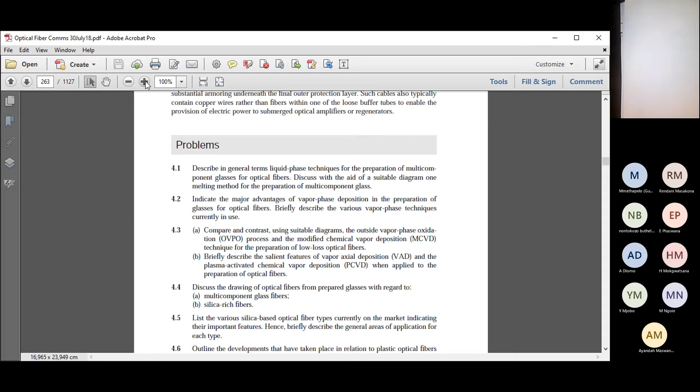Let me make this a bit bigger. Is it better if it's a bit bigger like that? Yes, I'm sorry, it was a bit small. It was a bit small all the time. How could you see such small things? You must tell me immediately. You're allowed to talk anytime, people, you can talk anytime. You can ask me anytime, it won't disrupt.

Eh? What is that? I can't hear you properly. Okay, someone said something, but I didn't follow that.

People, chapter 5 is about fiber connections and joints. How do we join it? How do we join this fiber? How do we make a much longer fiber out of it?

Also, couplers and isolators. Remember the words coupler and isolator. Those two things, you must know what they are. If I ask you what's an isolator or a coupler in a test, we'll get to it.

But we'll do fiber alignment and the losses, fiber splices. That's actually how you join it. Fiber connectors, expanded beam connectors, and fiber couplers. And isolators and circulators, you must know what these are as well.

Right, let's begin. This is an introduction, I'm going to just skip that. I want to tell you that when you join fibers, there are a lot of losses actually. When the two fibers are joined together, you see here, even when it's smooth and perpendicular - meaning 90 degrees or 180 degrees exactly - even then there are some losses.

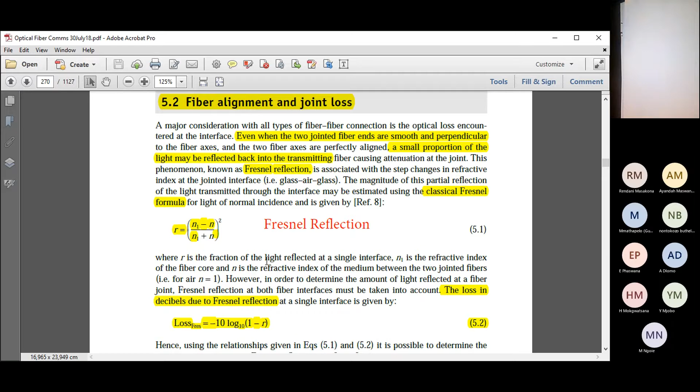So the reflection value is N1, the core value, minus N. N is for the air, okay? Now for air it's usually 1. So it's N1 minus 1. And then N1 plus N, which is N1 plus 1. So you square it and you've got the Fresnel reflection value. So here they say N is 1, which is for air, because we go from air into the fiber.

However, people, if this fiber was inside water, we will go from water into the fiber. So N will not be a 1 for water. N for water will be maybe like, I don't know, maybe 0.9 - it'll be given to you. I'm just mentioning how this N works. So it's a mirror basically going from air into the fiber.

Now the losses in the fiber, the Fresnel losses, is minus 10 log 10 of 1 minus R. So you take that R value, 1 minus R is here, and you calculate the losses. You must know this formula. You must know the Fresnel formula.

So this is just a numerical value, the numerical ratio - they call it in math the numerical ratio. Do you still remember your math numerical ratio? However, this is a dB value in decibels, this value here. So the decibel value, this is how you calculate it. Because I might ask, what is the losses in decibels - not the numerical ratio here, R. Okay.

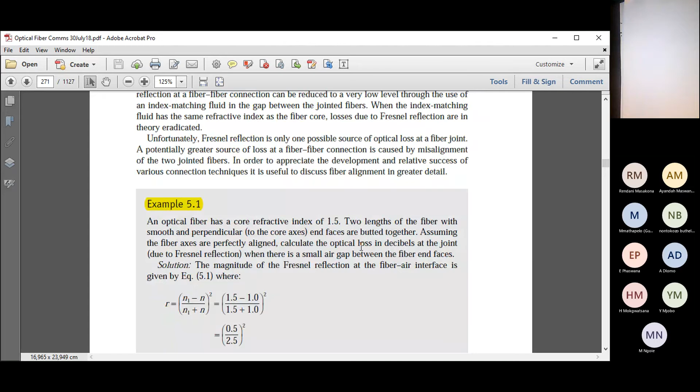Now R is the fraction of the light reflected. You see there - that's your face that you see in the water when you look down. R is your face. Yes, you've got an R face - no, just a joke. Right, so you can do this example. Please mark this example. You must know this example and work through it, because this tells you how the Fresnel losses work.

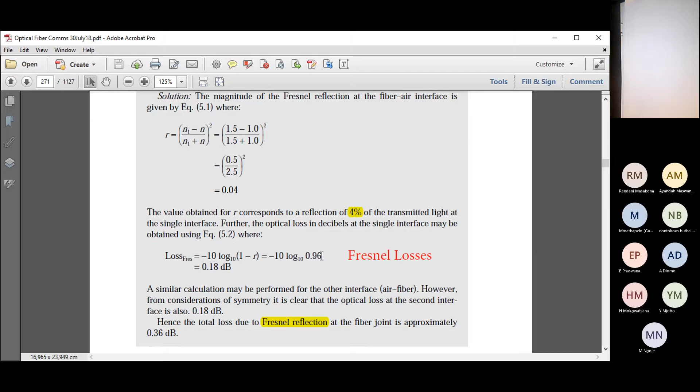Right, I'm not going through the example. Do you have any questions on this?

Okay, then we've got other ways and places where we've got losses for the fiber. There's about 5 of them, but I'm going to show you 3 now. The first is longitudinal misalignment, when the fiber is a bit distant from the other fiber, and you join the two fibers but there's a gap, an air gap. It's longitudinal misalignment, and there's a formula for it to calculate how much the losses will be.

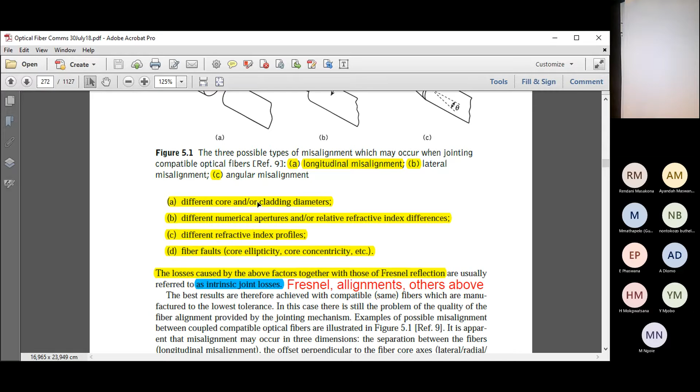Also, other things that contribute to losses are different core diameters. If my core diameter was different here than here, say this core diameter was bigger, then it will not be aligning so nicely, and it will also cause some losses.

Another one, different numerical apertures. So if this fiber has a different NA than this cable, say the NA of this one is 0.2 and the NA of this one is 0.3 - people, you cannot join fibers with different NA. You can try it, but it'll have a lot of losses. Just remember that, it will work for a short distance, but there will be some losses.

Alright, fiber faults - maybe the core is more elliptic, or the concentricity isn't so good. So if it's elliptic, it's almost not circular, it's like an ellipse, and this one is circular. Imagine the diameter is smaller in this direction and bigger in that direction because it's elliptical. Then you will have a lot of losses because the cores are not the same - they were manufactured from different cables, so it's not a good idea to join them. But if you really want to do it, you can. Just remember your losses will be more.

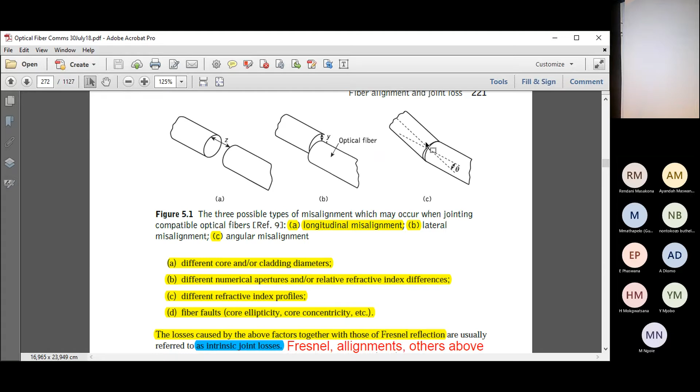I don't have formulas for these four, but I've got formulas for these three here. We'll get to the formulas now, we'll talk in detail about this. But you can see here, people, there are 7 things causing losses, do you see the 7 things? The 8th one here is really the Fresnel losses, okay?

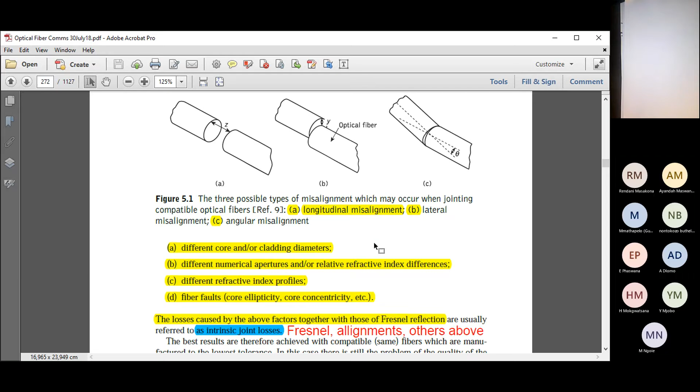So it's 1, 2, 3, 4, 5, 6, 7, and then also the 8th one, which is the Fresnel one here. So add it to these ones to get your total losses. So each cable, when you join it, there are a lot of losses for it.

Right, I'm going to carry on and skip a lot of stuff here until I get to multi-mode fiber joints. It can also have lateral, angular, and longitudinal misalignments, and there will be losses, but I'm not going in detail into that. I'm not going to do this formula.

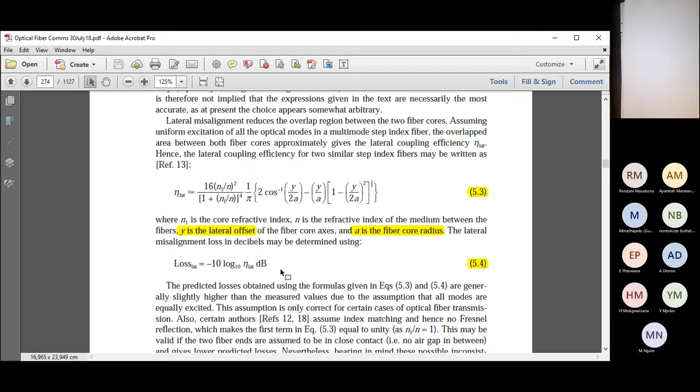But you can look at this formula here. So the lateral losses is this one. There's another one, 5.5.

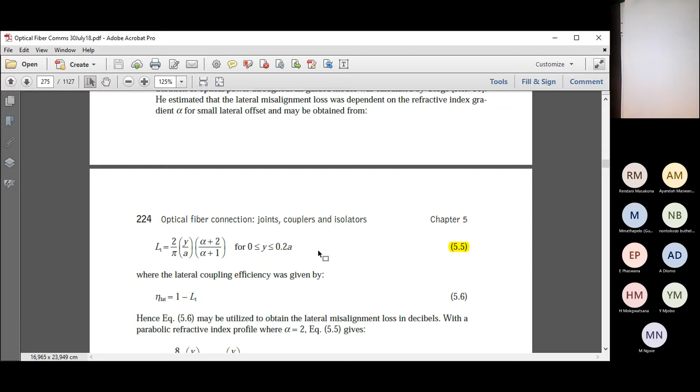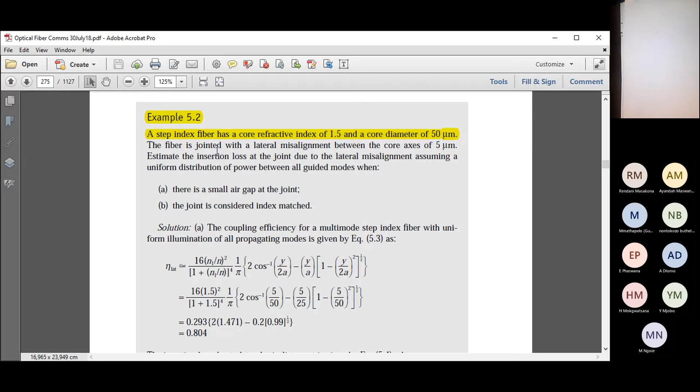And then you can really do this formula in this example, 5.2, step index in Chapter 5 with this. I'm not going to go through it, you guys can go through it. So in this one you can calculate your lateral losses, and actually it's called the coupling efficiency.

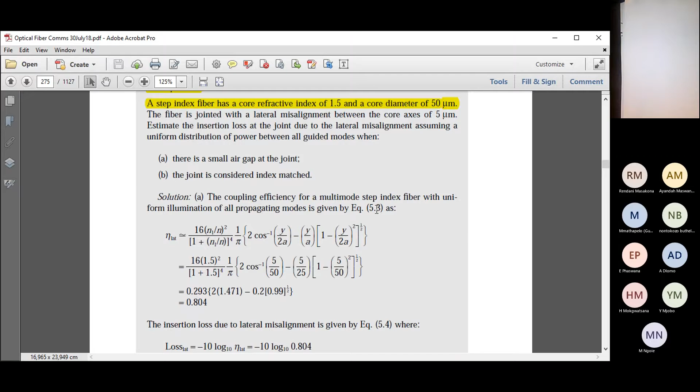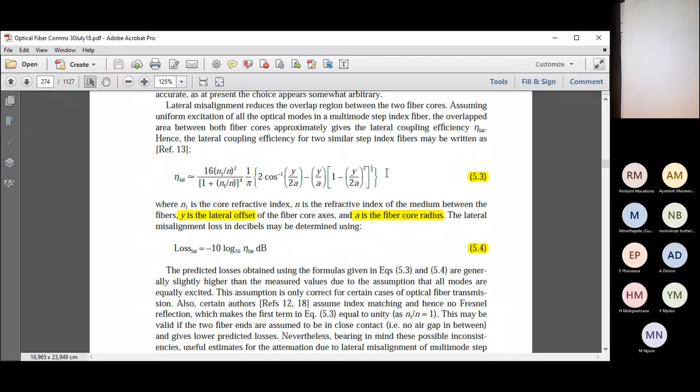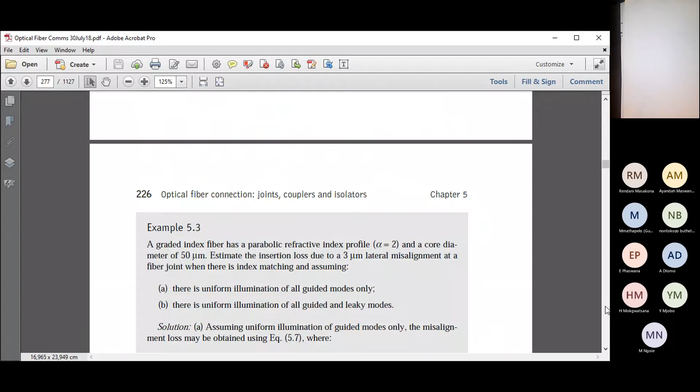Coupling efficiency, look at the formulas - 5.3 and 5.4. It says those equations are the ones above here which I showed you, which are these ones, so include this one. Sorry, I made a mistake, just include this one. Alright, so do that example. And here, I'm going to skip this example, I will not ask you this one.

This is for the graded index fiber, which is just the same as for the other one. But I'm going to leave this 5.4 example as well. I'm going to leave it alone. I'm not doing it.

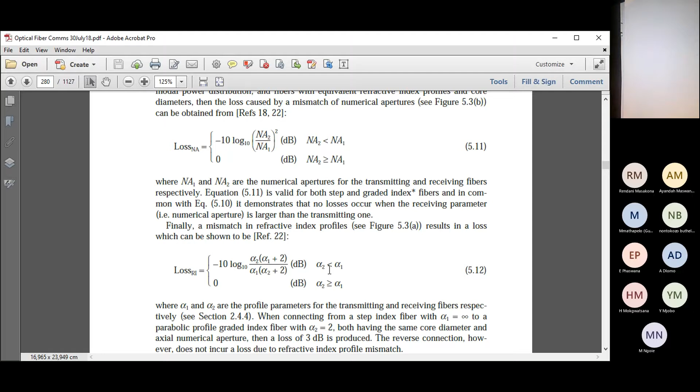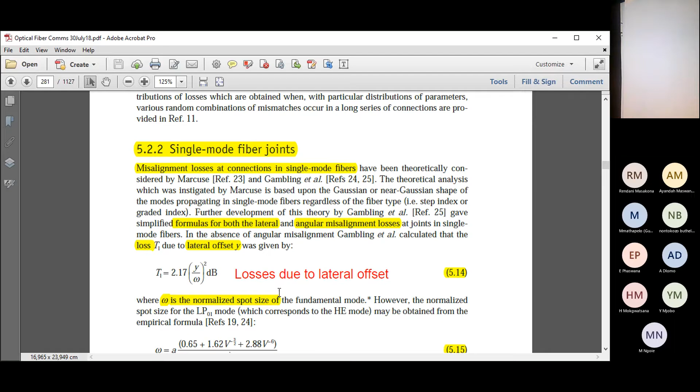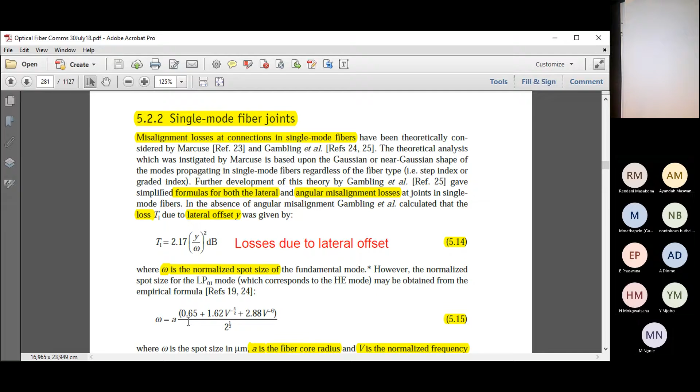So you can use this formula to calculate, where omega is the normalized spot size. The spot size here, and the omega you can calculate here. To calculate the spot size, you can use this formula. And I think we had it 2 weeks ago also. But it's basically this one, that is minus 3 over 2.

And let's just do a minus 6 there. And that is 2 half, which is the square root. So just remember the formula is very fixed there. These numbers are fixed. And you multiply those with the, I think A is the radius. That's not the diameter. People, if I give you the diameter here in a test, I'm going to catch you, because it must not use the diameter here. I'm pointing it out to you because that's what I do. I give the diameter here and then you come and put the diameter in there. Then this one is wrong.

So calculate your normalized spot size, omega, put it in that formula, and then you've got your losses here. And that loss is actually already in dB. You don't have to say 10 log, it's already a dB value in losses here. Okay, that Y is the lateral offset, okay? It's all written here, so look at this page.

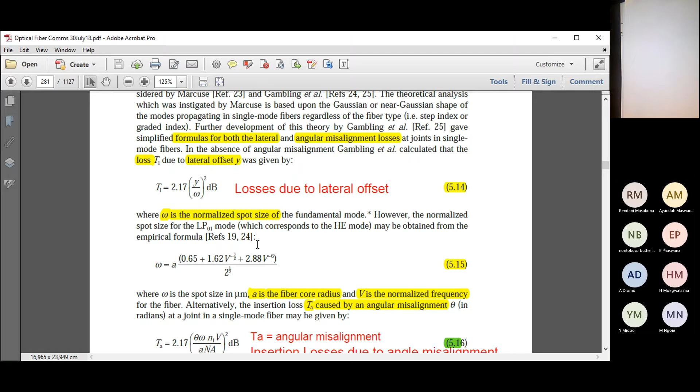And this one is the angular losses. So the angular losses, it's also in dBs - is your angular misalignment value, and insertion losses due to angle misalignment. So if I ask you to calculate the insertion losses, and lateral losses, I can give you these two formulas. You have to calculate that.

Right, I'm going to skip. There's an example, and look here, I've asked it twice in previous exam papers, so you can see it's important to go through this one. Go and work through this example 5.5. It tells you how to do different losses, and then at the end, if I ask you the total insertion loss, don't give me that one - that's only for angular misalignment. Then you must add those two losses up here to give me the total value. Do you see? So all two together will be added up to form this value.

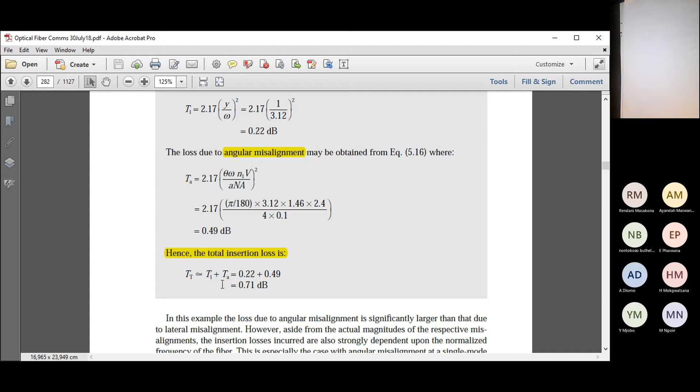I'm going to skip this example, I'm not doing it. Example 5.6, skipping there.

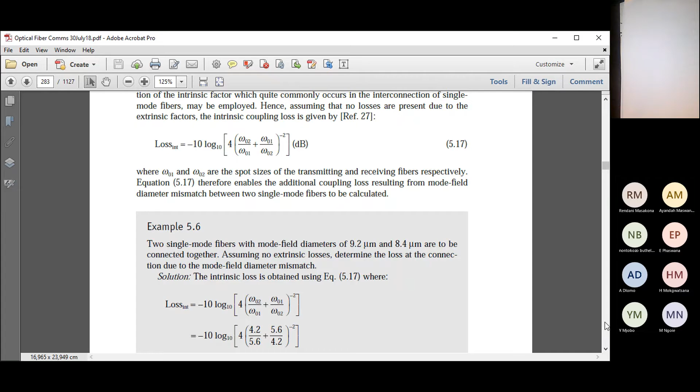And we're coming to fiber splices. Splicing fiber means how to join the fiber, really. So we've got mechanical splicing, and then we've got fusion splicing. These are the main two types, people. If I tell you to give me the main two types of splicing, most people cannot do this, but it's in this paragraph here, it's written.

Fusion splicing is when you apply it with heating. Mechanical splicing is when you hold it together with a joining - that's fusion joining, we melt it. This one we don't melt, we just hold them together right across each other, held there mechanically in a clamp.

Alright, let's do it in detail. First thing, when we want to splice a cable, we take a knife edge and we make a crack in the fiber there. This is a mandrel. We curve it over the mandrel and give it a cut here. It's going to break off very squarely, a 90 degree angle here at this point. So we cleave the fiber. We call it cleaving.

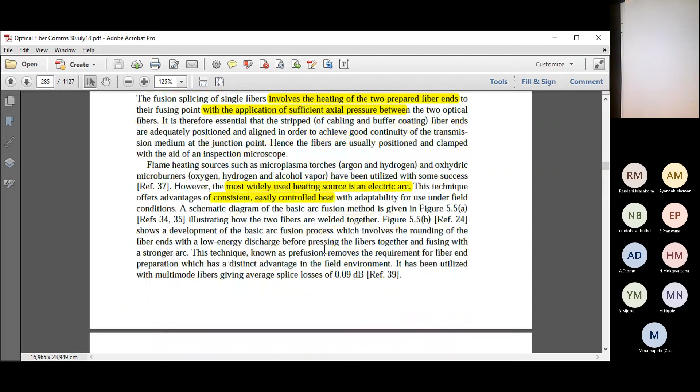Fusion splices. That is now when we melt it together. Okay, how do we do it?

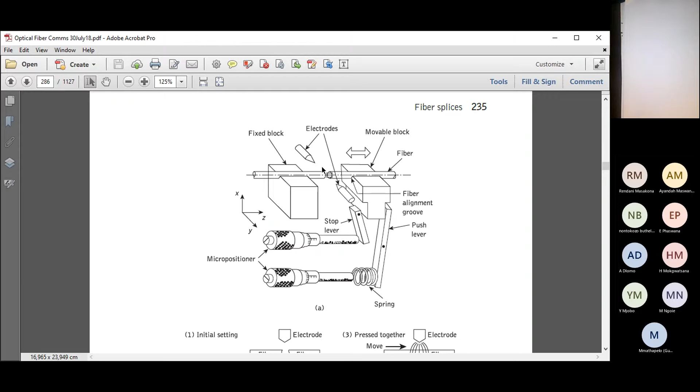It's like this. They've got two electrodes on the side of the fiber, and two mechanical clamps, one here and one there. They align these two blocks to each other. Your eyes can't do it because you will never see that with your eyes, but they can do it by shining light in here and seeing how much light comes out, aligning these two perfectly. Then they press them together and melt it with these two electrodes with the electrical arc. So there's your fiber joining, and I melt it with an arc here, and it's square.

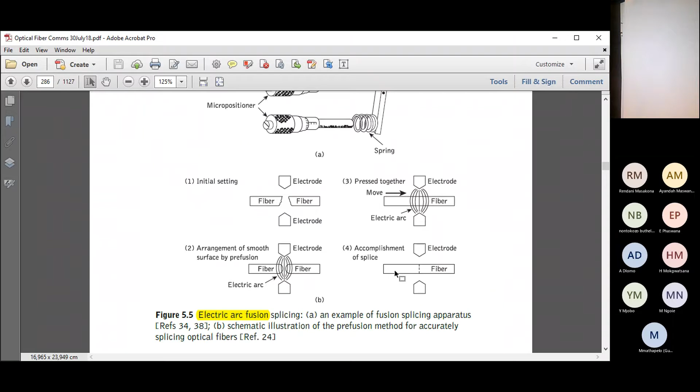It's arc fusion. With an electric arc, they arc it, and it's joined. The fiber is joined like that. Not so perfect like here, but almost perfect.

Right, that's mechanical. Oh no, sorry, that is fusion splicing. In this case, they hold the fibers next to each other, but not very well. You can do it with your eyes. You align it almost precisely there. Then when you give heat at this point, it will self-stretch, and it will connect like that at first, because there's surface tension here.

The surface tension will make it straight. It will straighten as soon as you melt it, and there will be a small error there, but it will be a good fusion alignment, self-aligned splicing here. So you can check out this picture, also figure 5.6.

Now we're getting to mechanical splices, alright? It's a common method where we align the two tubes, and to align them we can put them in a ceramic capillary, just big enough for those fibers, and we join them with epoxy. They take epoxy glue and seal it mechanically.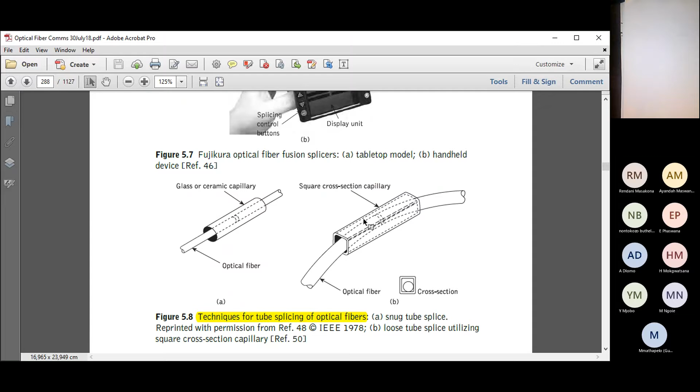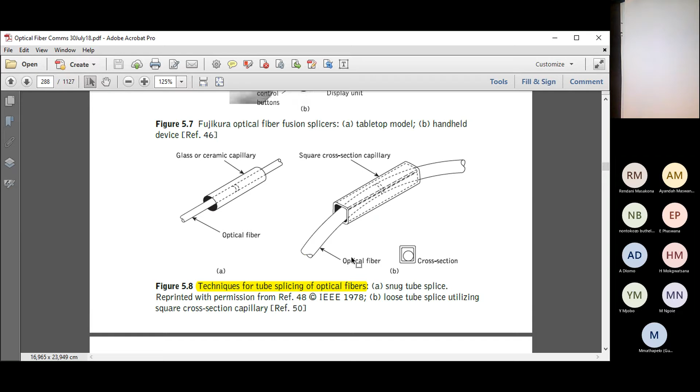This picture shows how they do the alignments. Also what we have is V-groove alignment. You can read this stuff here, V-groove alignment. They talk about it, and they fill up with epoxy resin after the V-groove join. The losses here are typically 0.1 dB, which is very little, but there are losses when you join.

This is a V-groove, this is how it looks. I've asked it in that exam, by figure 5.9, you must know it. The V-groove method, it's a V-groove there, you see the V? It's a little groove there. This is very small, people.

This is like half a centimeter by half a centimeter, a little V-groove. So what you do is take the fiber, put it in that corner, this fiber into that corner, and put epoxy and glue in there. You're going to glue this thing together. What you do is put a little flat top, there's a lid, you put it on top and clamp it. The glue is now in there, it's joined. The V-groove will align it, so you've aligned this fiber.

This is another one, it's an elastomeric splice. What you do here, it's a little tube like that, also very small, 1 centimeter long. Then you put, there's a little hole in the middle with a cone here to help you find the hole, otherwise you'll never find that hole. There's a cone cut out there also, so you put the fiber in the cone cut out and it will go into the middle. You put some epoxy and you are done. It looks like this afterwards.

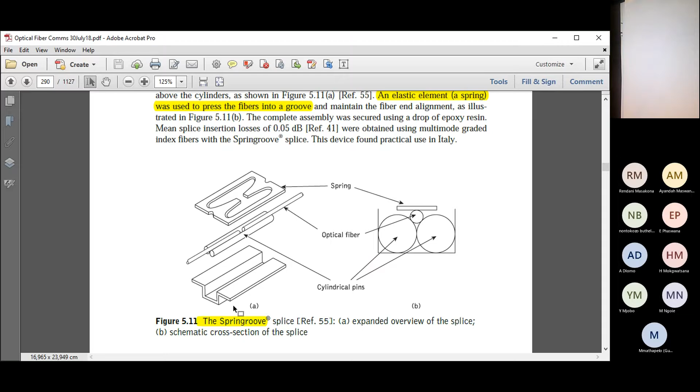And then there's a spring groove. What I do here, they take 2 cylindrical pins. They put the fiber on top, and I put a little lid on a spring. The spring looks like this. So they put it on top, and this whole fiber will be very well aligned here, and they will glue it together with epoxy. So that's the V groove and a spring groove, and the cylindrical splice. The 3 types - you must know those 3 types.

You must know these pictures, how to splice a fiber. This is how to splice it with capillary tubes. So there's your capillary tubes that we talk about, your cylindrical sleeve, okay?

What I then do, this fiber comes in here and it ends in a glass ferrule there. This fiber comes in, it ends in a glass ferrule there. And what I do, they just put it together with a little sleeve here, and I join the 2 fibers. This is how it looks inside a connector, because there's no glue here in the middle and you can still separate the 2 connectors from each other. So you can unplug your box here, but the glue is usually inside this part. They put the glue inside that ferrule, and that ferrule they will put epoxy glue in there also, and the connector will join it.

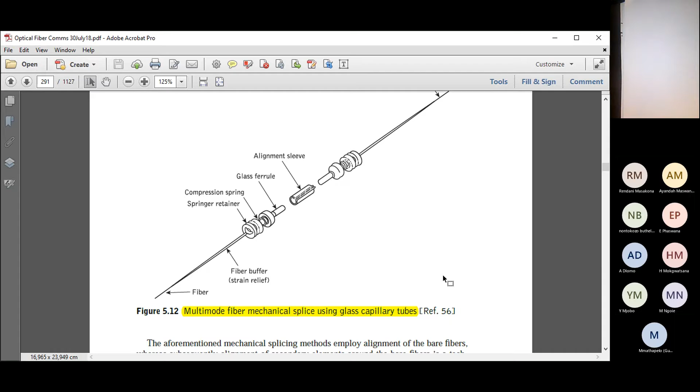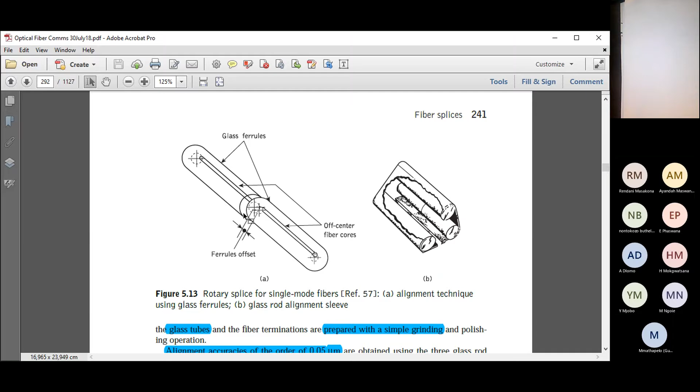I'll show you another connector now. Okay, this is another way of splicing it. They've got an off-center hole there and an off-center hole here, and I will turn them until they align. It's another clever way of doing splicing with 2 ferrules. I call this a ferrule, and that ferrule there, and I will align them by turning them. It's not so important, but I'm just showing you for the interest's sake. There's different ways to splice and join fibers.

Multiple splices, people, that's if we must do more than 5 or 10. What we will do here, it's almost like a ribbon cable. There's your ribbon with maybe 10 fibers. You clean the plastic off here, okay? Then you've got a silicon chip at the bottom with grooves in it, and a silicon chip on top with grooves in it. And what you do, you push the ribbon in from this side and the other one from this side, and you clamp it with these 2 top and bottom silicon chips. It's very small, like 5mm by 6mm, or even smaller. But you can join 10 fibers or more with this. It's actually a 12 fiber splice, what we say here.

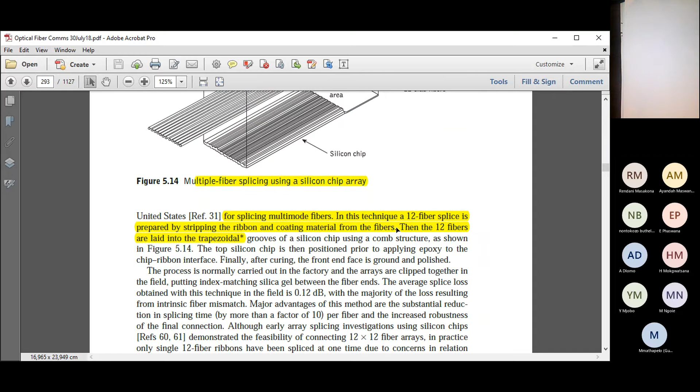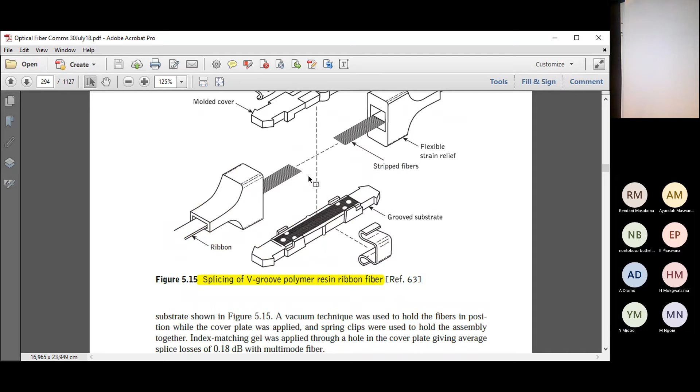You can have this type V groove polymer resin where you've got another 10 or 12 fibers, another 10 fibers here on a flat cable ribbon coming in. You must join them here. How do you join them? You put them in this clamp mechanism with grooves at the bottom, and that one has got V grooves on top, and you just clamp them in, and afterwards you put the steel clamp on it from this side, and the steel clamps will hold the whole lot together. And then what you'll do, you'll put epoxy glue there in the middle and it will be joined.

You buy this connector, people - this connector costs about 800 Rand if you buy it. But you can buy it, you can join fibers with this connector, and you can unplug it again.

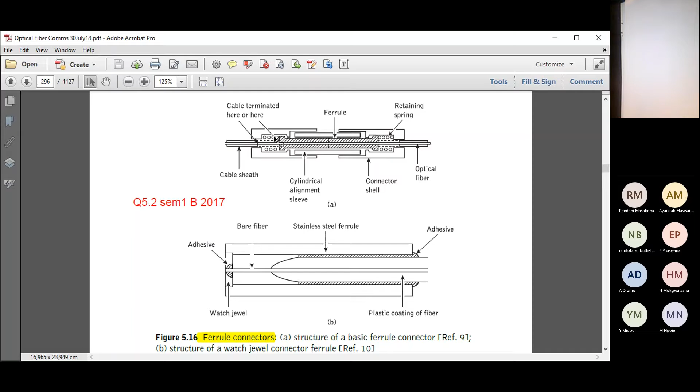That's where the mirror will be. Okay, so this is a ferrule connector. I'm showing you other ones as well, but I'm just showing you this one now. This is how you can unplug this connector again to move your box to another room, then plug it in again with some other cable. That's very nice, but the losses here are a little bit more than when you melt it or do V-groove or cylindrical joining. The losses are a little more, but it's not too bad because we can actually remove the cable, unplug it.

So this is an ST connector. You get SMA connectors here on the sides. You get all kinds of connectors here. I'll show you just now.

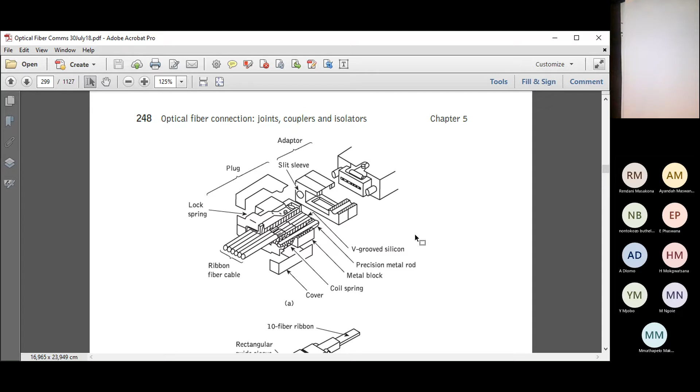It's just other ways to do it with multiple fibers in a connector. This is how they do it. You don't have to know this picture, I'm just skipping it quickly. Here you can see there are other connectors like an SMA, like I've said, an FDDI connector, a D4 connector. That's an ST connector with a bayonet there.

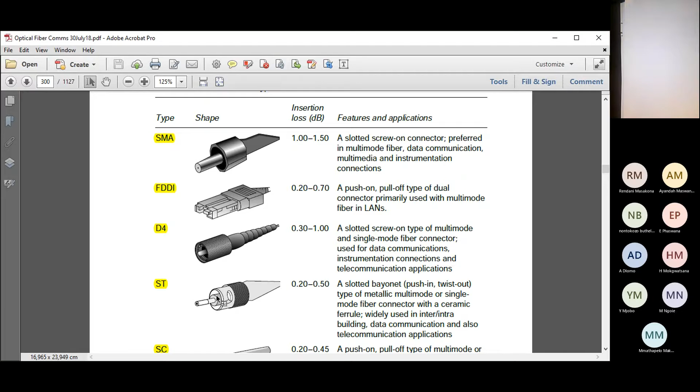This is an SC connector, simplex and duplex, one cable and two cables. You can do both here, but mostly we do one at a time. There's your FC connector, your MU connector, your LC connector, your E2000 connector. People, they are all different, but I've seen this E2000 a lot on the lasers lately. They use this connector for the laser.

It's got a little plate there to protect it against dust, and when you press this button here, it lifts up that plate, and the fiber is exposed. You can join it with another connector. This is a type of connector that I plug directly into the laser module. It looks like this. Then you get the MTRJ connector, the MTP connector.

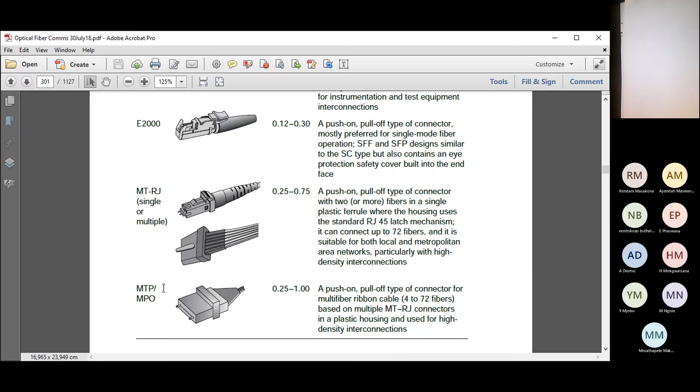Guys, do you want to learn all the names? No, I'm not going to ask you any of these names. I'm just showing you what they are and what you get. You get hundreds of types. You can't believe it. And look here.

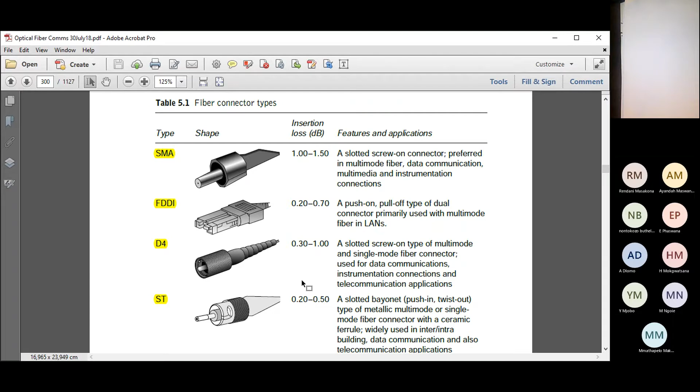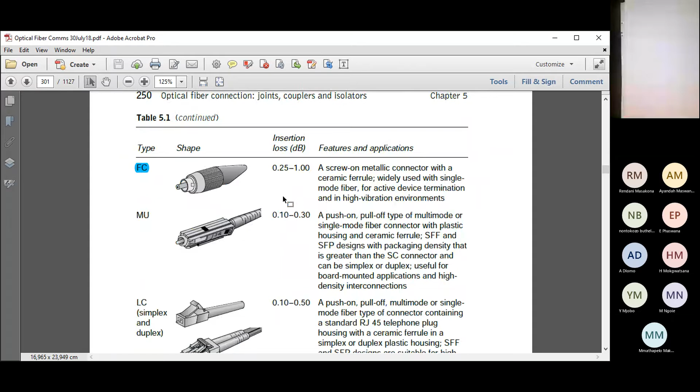Do you see the sizes are all different? And the losses, sorry, not the sizes, the losses here. They give the losses for each one. If you want low losses, you choose here, like this one. Like I said, this one is also very popular, as well as this one. Losses are very low. See, those are the losses. Right, I'm done with it.

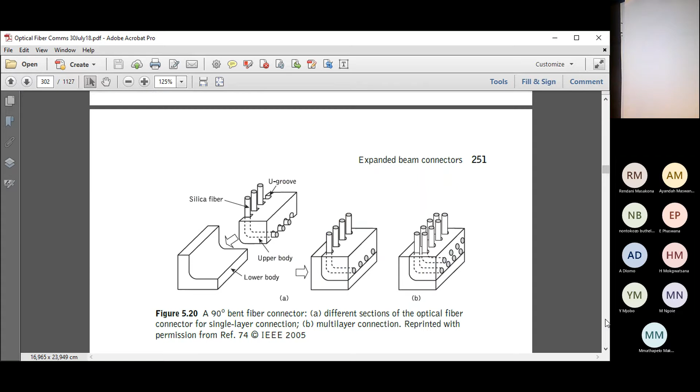You don't have to know these pages. What I'm showing you now, you must just know that there are other cable connectors which we don't know of. We've never seen them. We rarely see all of them. We usually see one or two types these days.

Okay, expanded beam connectors. How can we align these things? It's very difficult, man. When you align these two little fibers, it's very, very difficult, and alignment's not very good. So what happens? The signal doesn't go nicely through. It's big problems, people, big problems.

Expanded beam connectors. I think you must know this one. What is an expanded beam connector?

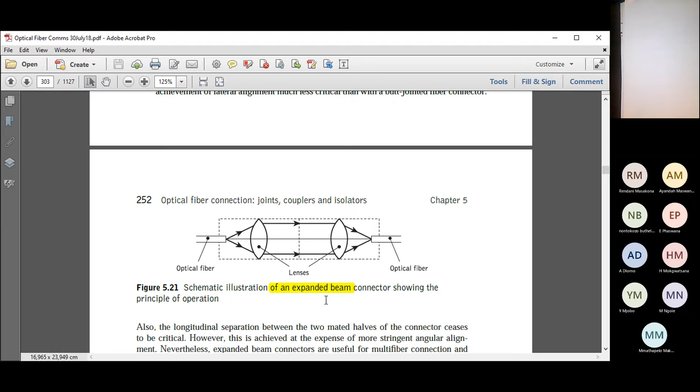The next one I'm going to talk about is micro lenses. I'm not going to talk much. They put little round ball lenses in there, in the connector. People, this is 1 millimeter small. It's very small, but they are round lenses there.

And it works like this here. It will have a diverging point here and a converging point on that side. So the thickness of this connector is about 6 millimeters from there to there. So it gives you an idea, this lens is only about 1 millimeter big.

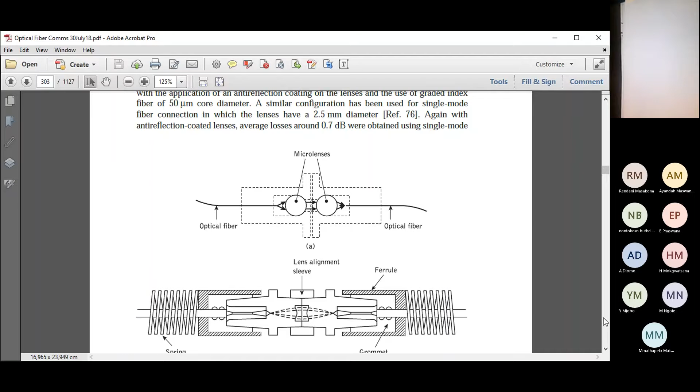You don't have to know this picture, I'm just showing it. And a lot of other things.

Okay, something that you must know is GRIN-rod lenses. What is a GRIN-rod lens? A GRIN-rod lens is a collimation lens. You see the word collimation.

And it's basically a graded index lens with collimation. What does collimation mean? Man, it's another English word. I don't even know what you'll call this in Zulu or Sotho. They will have some other explanation, but these words are not translatable even in other languages. They just call it collimation. So you must just learn the word, okay?

Because I can't translate - collimation means basically you put in light that is not focused at the right point, and collimation means you can focus that light on a point. But collimation also means, even when the light is like oval shaped, a collimator lens can make that oval shaped light round. Even if you have a light beam shaped almost like a triangle, you can make a collimator lens that will fix that light into a round spot.

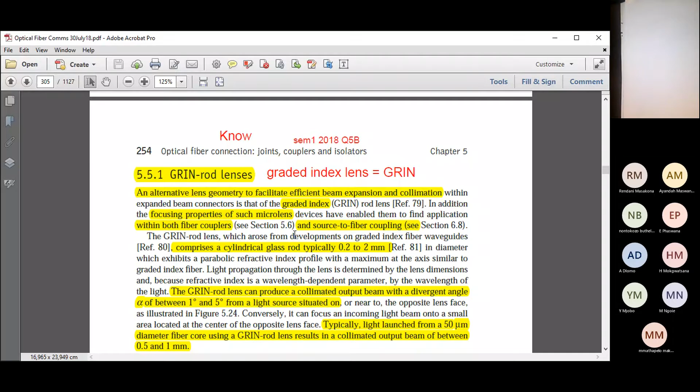Right, there's some formulas for them. I'm not doing the formulas - you are lucky. This is a collimator lens.

Right, there's 3 types of lenses. I'll talk about all 3 now. But let's do the first one - this lens has got a certain length here.

You see there, 0.25 pitch - that is the pitch of the signal. With 0.25 pitch, we also get 0.29 pitch, né? And a 0.23 pitch also. So I'll talk to you about those 3 now.

But basically, we've got 50 micron coming in - this size is 50 micron. Then we go to a half a millimeter here, the lens size, and it will diverge the light from this light to an almost parallel light here. So the collimator lens makes this light a parallel light, and it translates from 50 micron input light to 1000 micron light here.

People, 50 micron input light is like your hair, okay? 1000 micron is about 1 millimeter, so the beam will be 1 millimeter big. You can easily align this side, okay? But let's look when we put 2 collimator lenses together, we get a beam right through it.

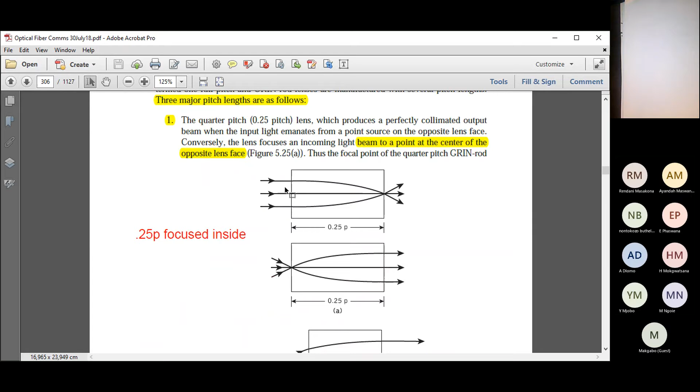And they explain here, this is the picture on top, and they explain it here. The focus is collimated outside the lens at 0.23. 0.29 also. Both focals are outside the lens, do you see? But on the first one, it's inside, it's not outside the lens. Here, it's just on the edges of the lens. 0.25 pitch.

It's outside the lens, the focus. Outside the lens, outside the lens. That is why we've got different pitches here. Guys, you must learn the stuff. Figure 5.25, please know it.

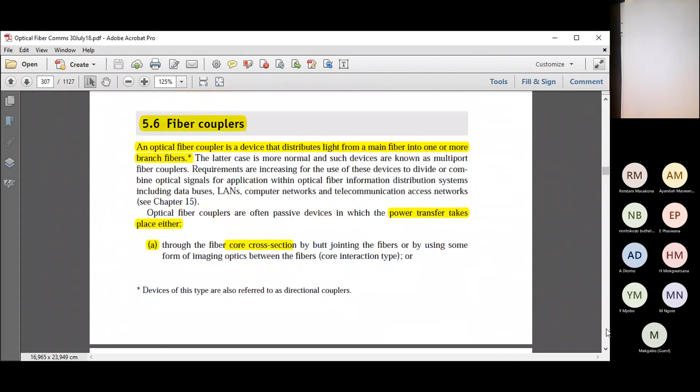Fiber couplers. Right, we can couple fibers this way, but we can also couple fibers this way, sideways, do you see? Okay.

So, in this case, they will react to each other with the surface here. In this case, that mirrors the Fresnel mirror there. But here, sideways, no. When we use that one, this one, we can have 1, 2, 3, 4 ports. They call it 4 ports. This can be a 4-port connector. This one doesn't have ports, okay, but this one has 4 ports.

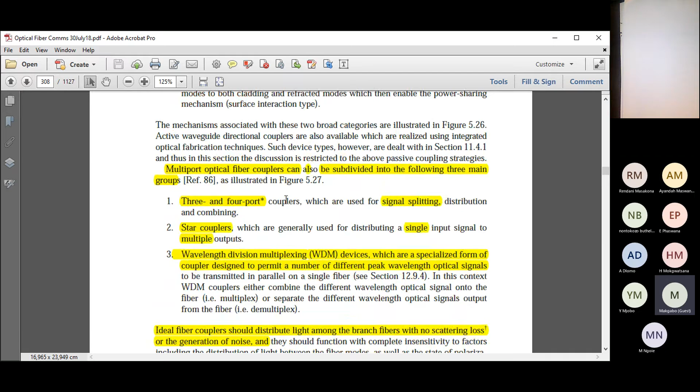How does it look? Now we're coming to it. We can have a 3 and a 4-port connector and a signal splitter. We can have star couplers and we can have wavelength division devices. But you don't have to know these points, I'm just highlighting them to you, what you can have. Now I'm going to get to them in detail.

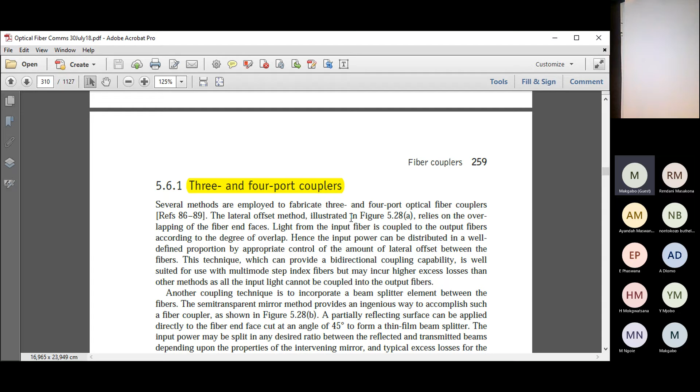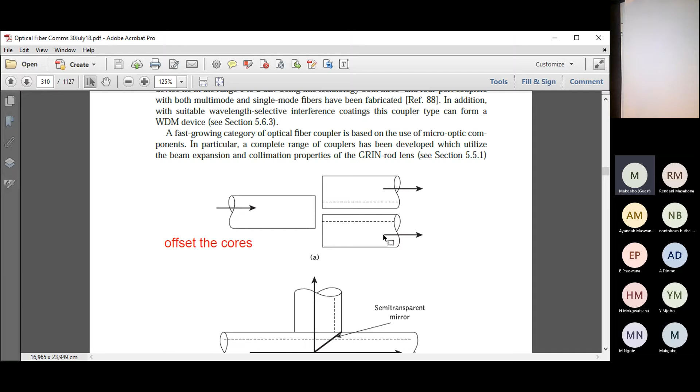Now we're coming to the 3 and 4 port couplers I talked about just now. Here they are: this is just 2 fibers going out and 1 fiber coming in. We want to combine them, send a signal in there and join the same signal to that one. We'll put some epoxy glue there and then we've got a splitter.

Also, we can do it like this: we can make a 3-port coupler with a semi-transparent mirror. Light comes in here, and there's a little mirror, half a millimeter by half a millimeter, inside the fiber. We shine the light coming in here, splitting it up to another one there, and it goes on. This is a 45-degree mirror, called a semi-transparent mirror.

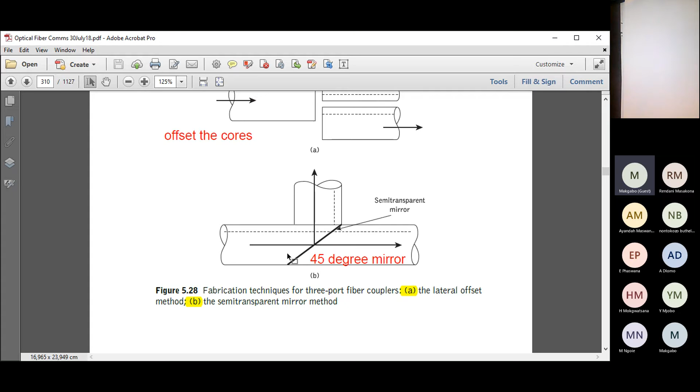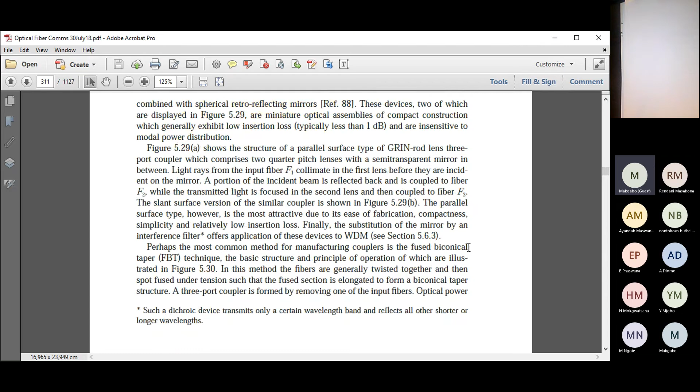You don't have to know these pictures, but just note how they work. Then you sort of need to know this one - this one you need to know the formulas for.

I'm going to go to the formulas now, it's easier to talk about them. So you can get the ratio of power into total power out of the fiber. This is a 4-port coupler, and we call this loss the excess loss.

It's already in dBs, so you must say 10 log 10 of power 1 over power 3 plus power 4, or port 1 over port 3 plus port 4. So this formula, the output is coming in at 1 and going out at 3 and 4. We can calculate this value and that value going out by using this formula.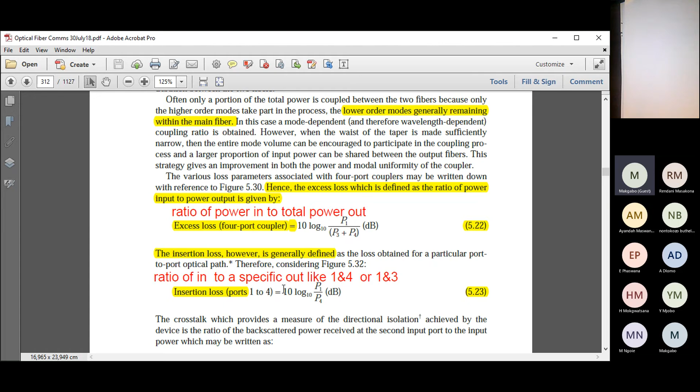I'll use this insertion loss formula for going in at 1, going out at 3. And I'll use that insertion loss formula for coming in at 1, going out at 4. Port 4 is an output, port 3 is also an output - you use this one for the insertion loss. At the end of the day, I want you to calculate the excess loss and the insertion loss. I'm only giving you the input power, then you must calculate the rest.

Then I can calculate the crosstalk between 1 and 2.

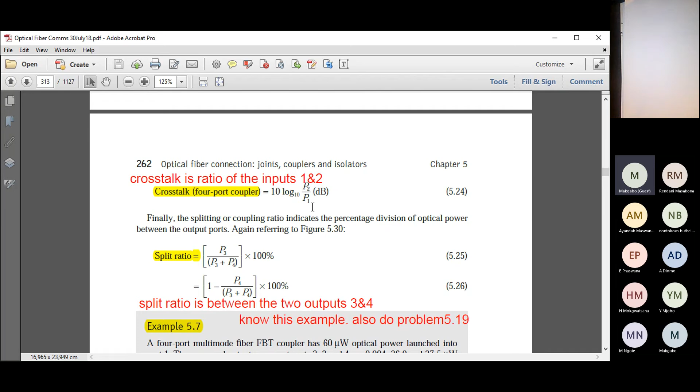Ports 1 and 2 will tell me how much crosstalk is in that fiber. Crosstalk is how much signal leaks into channel 3 and channel 4. You can use this formula: it's P2 over P1, and we calculate the crosstalk. Looking at the figure again, the input signal comes in here, and a small signal goes out there. This is a measure of the crosstalk in a fiber, coming in here and going out at 2.

That's the third formula. The fourth formula lets us calculate the split ratio - how much power is split between channel 3 and 4. The split ratio is P3 over P3 plus P4, and this one is not in dB, it's a percentage. So the split ratio could be 50%, meaning power comes in and splits 50% one way and 50% the other way. However, if the split ratio is 40-60, it means 40% goes out at 3, and 60% goes out at 4. It's the split ratio between the two.

So, to recap, we've got insertion losses, we've got crosstalk, we've got split ratio, and we've also got excess loss. Those four things you're going to calculate with this 4-port joint here, or coupler.

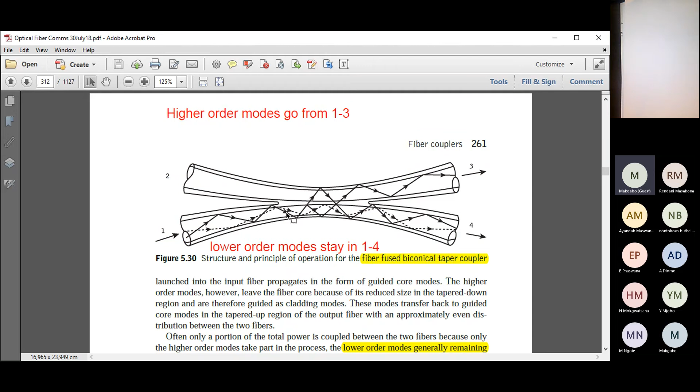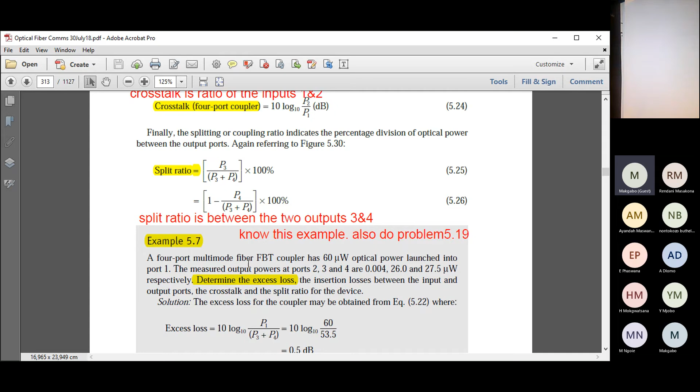Sorry, I've got a phone call. I just want to tell him not to disturb me. Hello? I've got a class, can you call me in an hour's time - hour and a half? What is it about? Just call me later, thank you. It's not my students, I thought it might be. Why I'm answering is it might be one of your Opto students, he cannot log in or so. Normally I don't answer my phone, but I just wanted to know if it's one of my students - I obviously must help him. That's why I'm answering the phone. Normally I don't do that.

So this example, people, you must know this example. Go through it, work through this example, and do it. It's a high percentage chance that I can ask you this one. I can ask you the excess loss, the insertion loss, the crosstalk, and the split ratio. These are in dBs - dB, dB, dB. But this last one, split ratio, is a percentage - how much is it split, the ratio. It's in a percentage, not in dBs. Okay, I'm done with it.

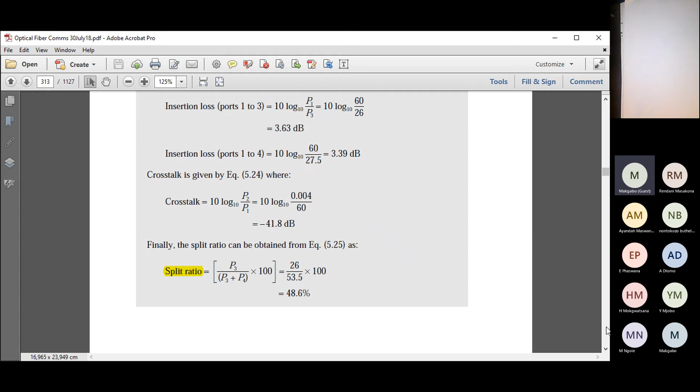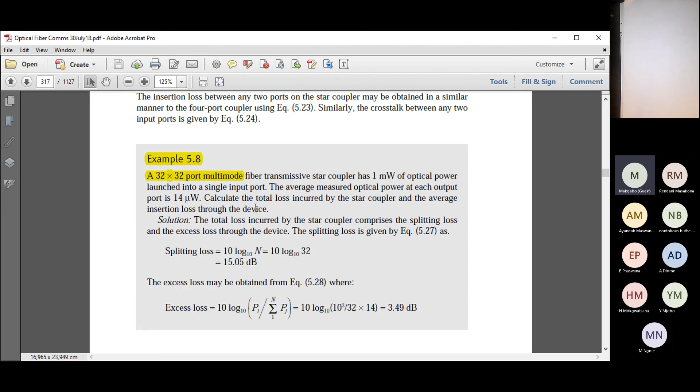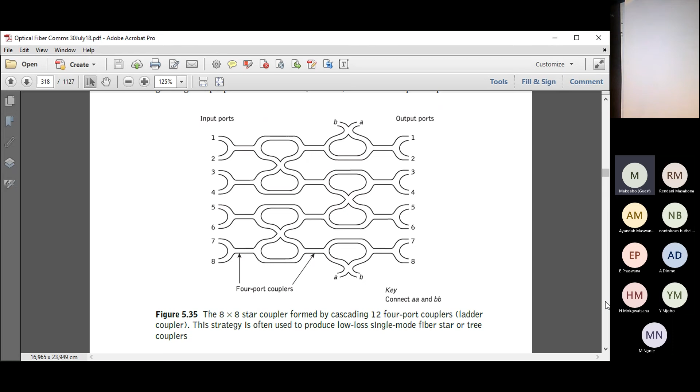Optics is a science on its own, just like electronics. They can amplify signals, they can divide it, they can add it, they can do mathematical functions. In optics, they can build a mathematical optic computer - it doesn't work like a normal computer, it's 1,000 times faster than any PC you can find today. These optical computers can do a lot of different things, a lot of mathematics optically, and much, much faster. They say the future will only have optical computers, it won't be electronic computers like today - they are just too slow. Okay, just for interest's sake, optical computers will be the future.

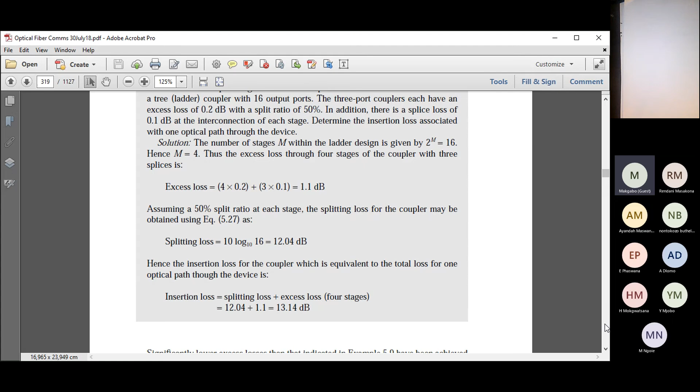Okay, this is, we don't have to know this. I'm just going to skip this stuff. I'm not going to do this at all.

Okay, this is an interesting one. This is what they do here. They split the light, and this is how they do it. That's called a Littrow grating demultiplexer.

So your 3 colors come in here, in 1 fiber. Then I've got little prisms there. People, this thing is like a quarter millimeter big. A quarter of a millimeter, this is small stuff. You can't even see this thing.

And then the light reflects off that surface. They can adjust it up and down here, and they can have different colors coming out there.

It's a graded-index lens. They also use graded-index lenses for this. They use graded-index lenses for a lot of optical stuff, guys. That's why you must know what's a graded-index lens, and that's why you must know what's a 0.25, 0.23 pitch, and so on.

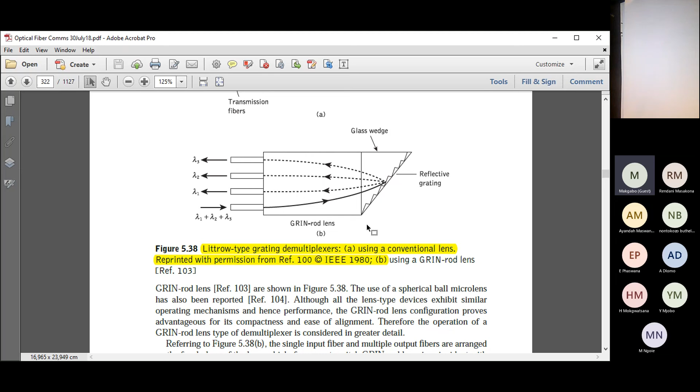But this Littrow grating demultiplexer is just a lens with a sort of a prism interface here, and then they can split the colors. That's how they do it. Very clever, this as well.

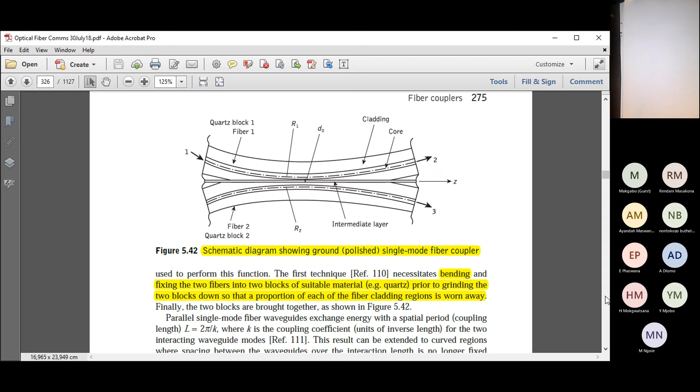I'm just skipping this, just the same stuff, I'm not going into it. This is really how they do a 4-port coupler. They actually sand it down to 50%, until the core touches the other core, and then they join it. It's just don't learn it, it's just a picture showing how they do it. Okay, you don't have to know this. Nothing here.

Okay, you must know this stuff. An isolator and a circulator. Most people don't even know what it is in the exam. I might ask it, probability is high. What is an isolator and what is a circulator?

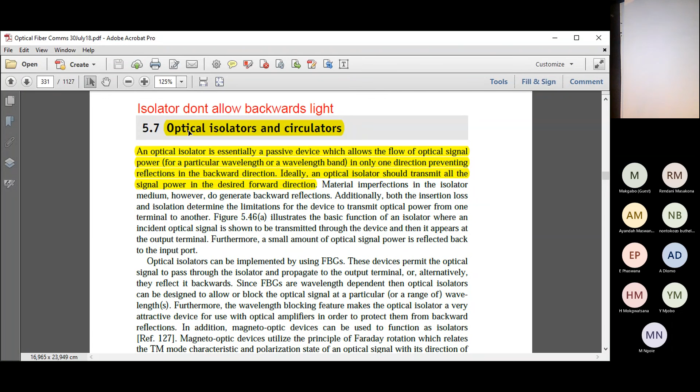People, an isolator is like a diode. An isolator only allows forward light, it blocks backward light. So when you've got a fiber and you don't want backwards light to damage your laser, you put one of these isolators in. Okay, isolator looks like this, there's a picture for it.

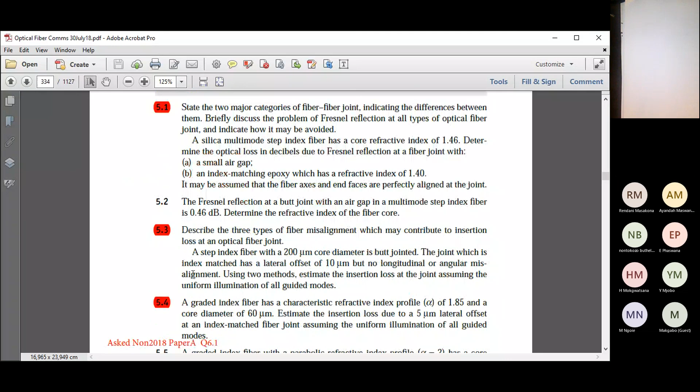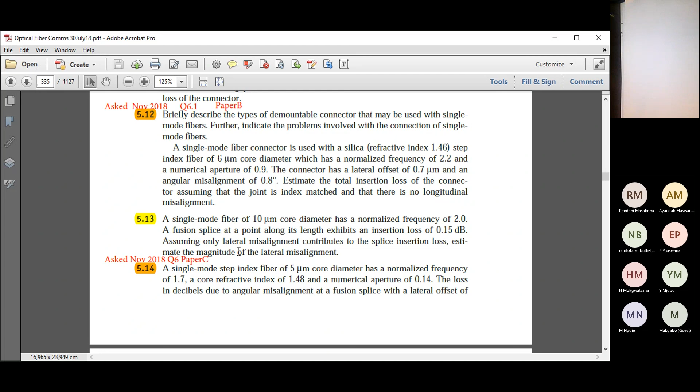Because there's some problems here, you can do them, but you don't have to hand it in to me. You can do it on your own: 5.1, 5.3, 5.4. I've asked that one in the paper, 5.5, 5.6, 5.7. You can do it on your own, but I don't want to see it. We are done with this one. 5.12 was also in that paper, and 5.13 you can also do, and 5.14 was also in that paper. Please do them on your own for homework. Do them, and I can ask questions out of them, and that's it.

We are done with chapter 5.